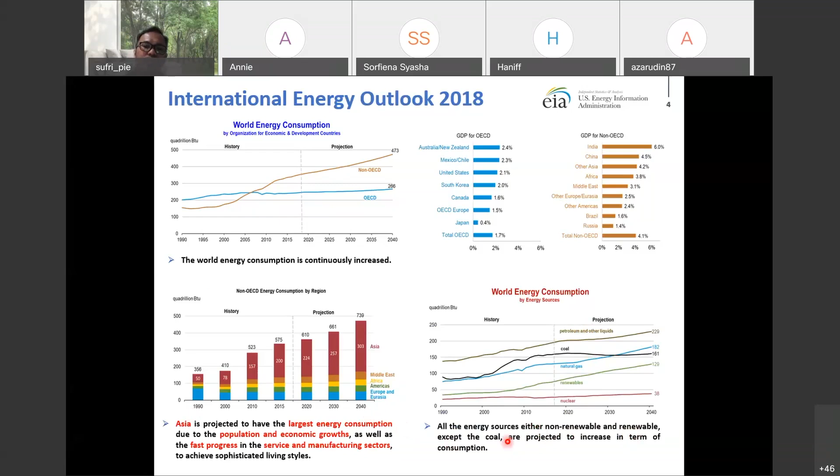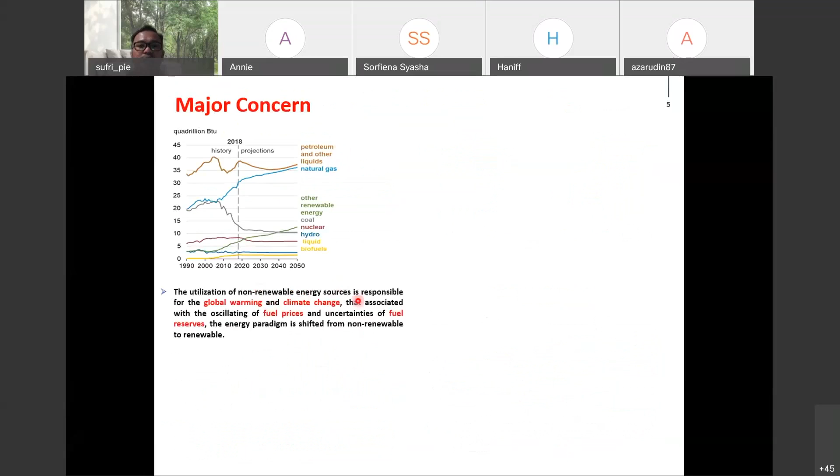So what is the problem with this increasing energy consumption? The major concern is the utilization of non-renewable energy. Non-renewable energy, for example petroleum and natural gas that we normally use in daily life, is responsible for global warming, and climate change is a problem we face every day. It is also associated with oscillating fuel prices and the uncertainty of fuel reserves.

So the energy paradigm has started to shift from non-renewable, petroleum-based energy into renewable sources of energy. We know transportation is the major contributor to carbon dioxide emissions, the main factor for global warming. Interestingly, from reports, mixing or combining the use of non-renewable and renewable energy could reduce CO2 emissions across all sectors.

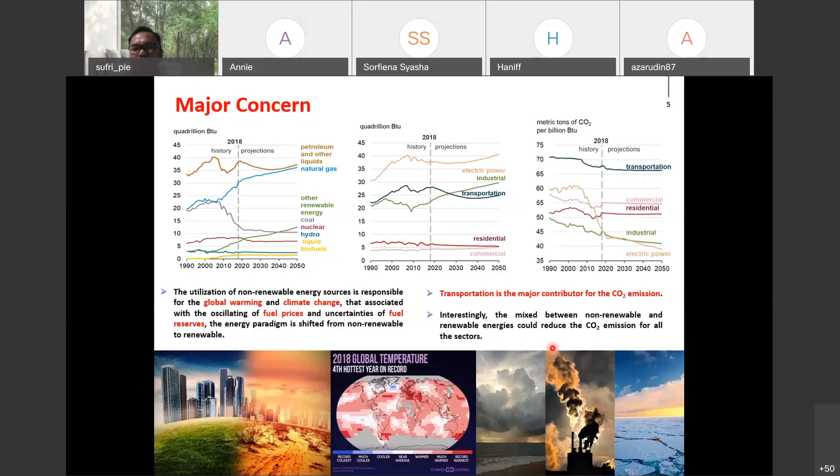The latest data regarding the world energy scenario is available in the Annual Energy Outlook 2020, published by the US Energy Information Administration. For those researchers and students involved in energy research, you can refer to this report to assist your research studies.

Since my research is more focused on hydrogen, let me explain a little about hydrogen as an energy carrier. It's quite famous - hydrogen can be used as an alternative energy carrier for the transportation sector due to the success of fuel cell technology. Hydrogen technology is very famous in Japan, and also in Malaysia. We have buses using hydrogen. I think in Sarawak they are starting to use hydrogen as fuel for their public transportation, mainly buses.

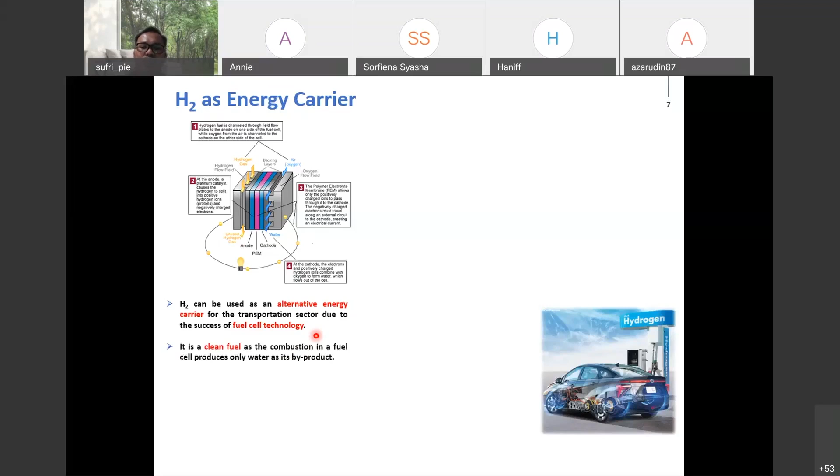So why are we interested in hydrogen? Because hydrogen is a clean fuel - its combustion in the fuel cell only produces water, meaning the product is water, so there's no CO2. This is the reason it has become famous nowadays. Another reason is in terms of energy density - hydrogen has the highest energy density compared to other types of fuel or energy.

Unfortunately, hydrogen itself is not readily available in nature. We have to extract hydrogen from somewhere - it cannot be captured from the air. So hydrogen can be produced from various resources, either non-renewable or renewable.

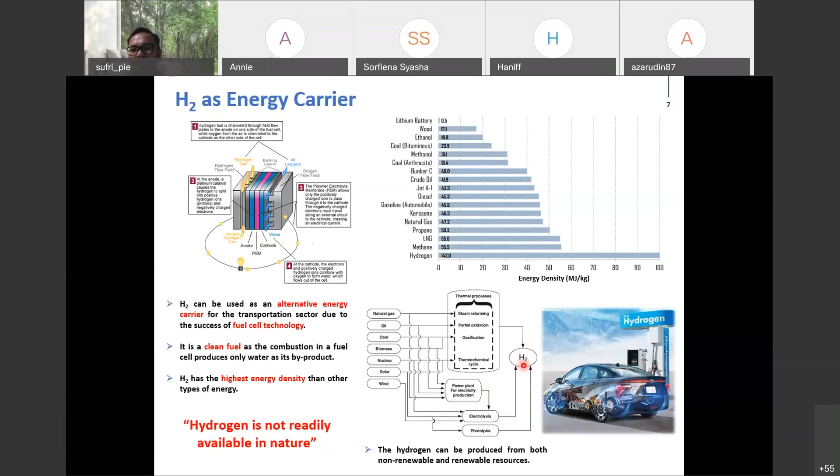As you can see in this diagram, conventionally we can obtain hydrogen from natural gas, oil, and coal - these are non-renewable resources. But researchers and industry have started to produce hydrogen from other sources like biomass, nuclear, solar, and wind. All these resources undergo different processes, either gasification, electrolysis, photolysis, and so on, in order to produce hydrogen.

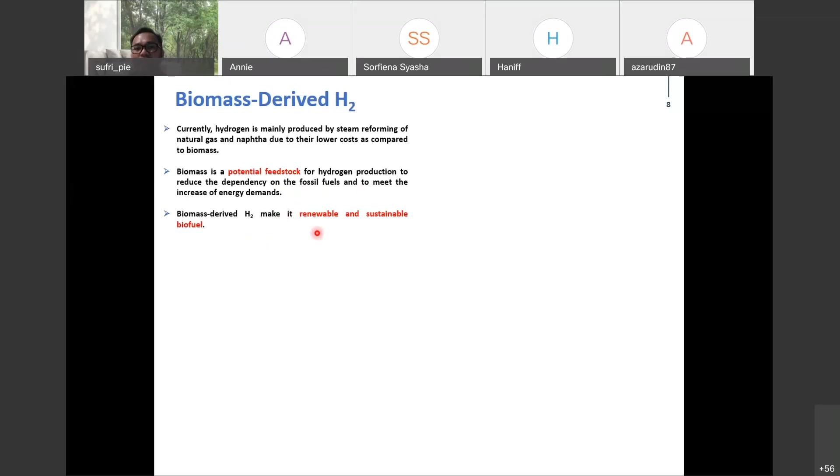I will be focusing on hydrogen produced from biomass. Currently, hydrogen is mainly produced by steam reforming of natural gas or naphtha - this is a non-renewable, petroleum-based resource, due to the lower cost of production. Biomass has great potential as a feedstock for hydrogen production. It can reduce dependency on fossil fuels and help meet the increasing energy demand. If we produce hydrogen from biomass, it can be renewable and sustainable as a biofuel.

So here are several examples of biomass that are widely available. We have corn, wood, and sugarcane - this is lignocellulosic biomass. But in Malaysia, or even in Southeast Asian countries, we are very famous for oil palm. So, oil palm biomass - for your information, each oil palm tree produces only 10% oil, while the remaining 90% is biomass.

So we have several types of biomass. We can have the frond, the pelepah. We can have the trunk, which is the batang pokok. We can have the bunches, EFB, after we pull out the palm fruit before extracting the oil. We can have the fiber, but for this research I will focus on investigating the potential of OPF, oil palm frond, as the feedstock for my hydrogen production. I chose OPF for two reasons.

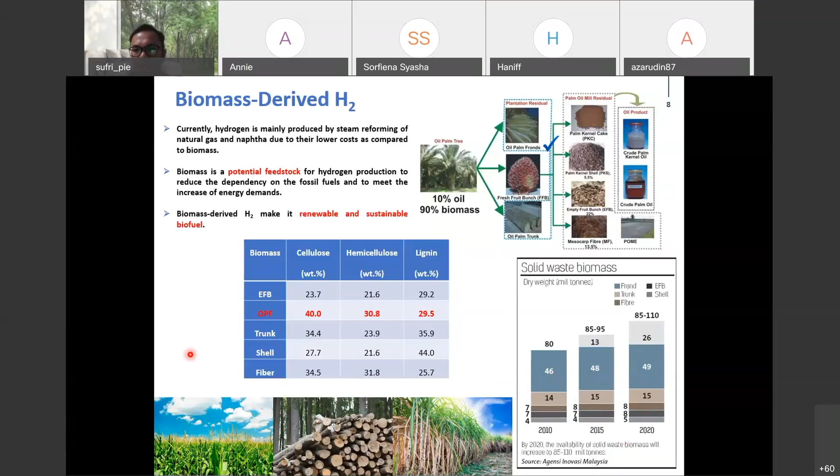So, conversion of the biomass is quite difficult. So I use this latest technology. It's not the latest; this is quite recent. We call it supercritical water gasification. From the name, it is the extension or modification of gasification. Gasification is the conventional way to produce gas from biomass. But in this technology, we employ supercritical water as the reaction medium.

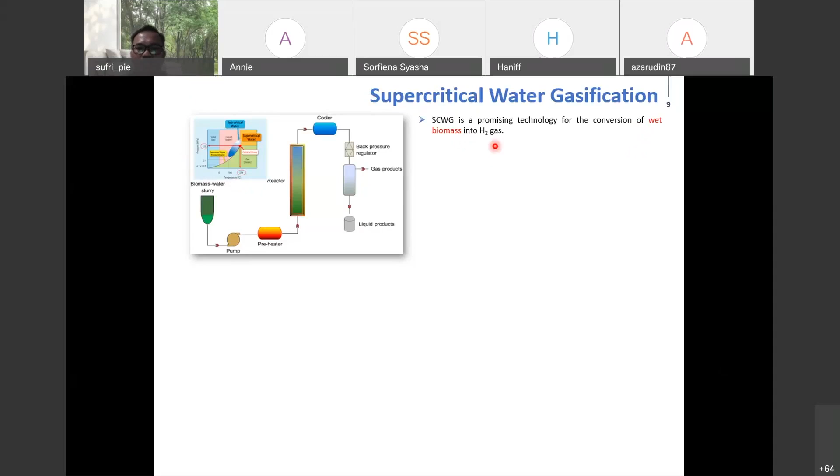Remember, biomass normally contains a huge amount of moisture. This is the main problem when we use biomass as the feedstock. In this technology, we use supercritical water as the reaction medium, so we don't need pre-drying treatment for the biomass because we mix the biomass with the supercritical water. However, in conventional gasification, before we start the gasification reaction, the biomass has to be dried.

So, supercritical water gasification of real biomass. Real biomass means real feedstock, like the ones explained just now, the bagasse, the corn. It's more challenging compared to gasification of a model compound. A model compound is when we focus on one type of chemical like cellulose, hemicellulose or lignin. Gasification of biomass is quite challenging because it's a mixture of cellulose, hemicellulose and also lignin. So converting this biomass into the simplest molecule, which is hydrogen, is very tough.

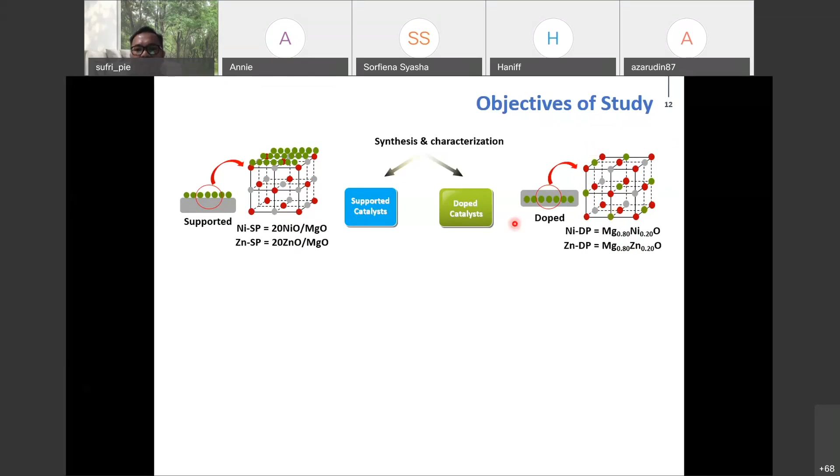For the objective of the study, I synthesized and characterized two classes of catalysts: supported catalysts and doped catalysts. For the supported catalyst, the active metals, nickel oxide and zinc oxide, are supported onto magnesium oxide, the catalyst support. For the doped catalyst, the active metals nickel and zinc are doped substitutionally, or inserted, into the cubic structure of the magnesium oxide. From this diagram, you can differentiate the supported catalyst and the doped catalyst.

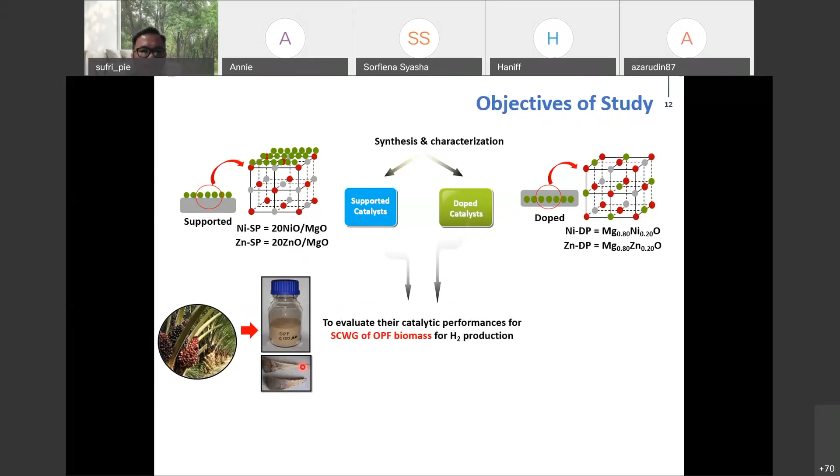Next, the catalytic performance of the synthesized doped and supported catalysts was evaluated for the gasification of OPF, the oil palm frond, in order to produce hydrogen. Hopefully, it can be used in a car. Last but not least, the relationship between the catalyst properties that we design and the catalytic performance will be discussed in detail.

For the methodology, the supported catalysts were synthesized using a conventional technique, the impregnation method. The doped catalysts were obtained using the combustion method. For details of the methodology, you can refer to my published paper; I won't explain it in detail. The precursors obtained from these two synthesis methods were calcined at 600 degrees C for 6 hours to give the expected catalysts. The catalysts then underwent a series of characterization techniques: XRD, BET, FESEM, HRTEM, and XPS analysis.

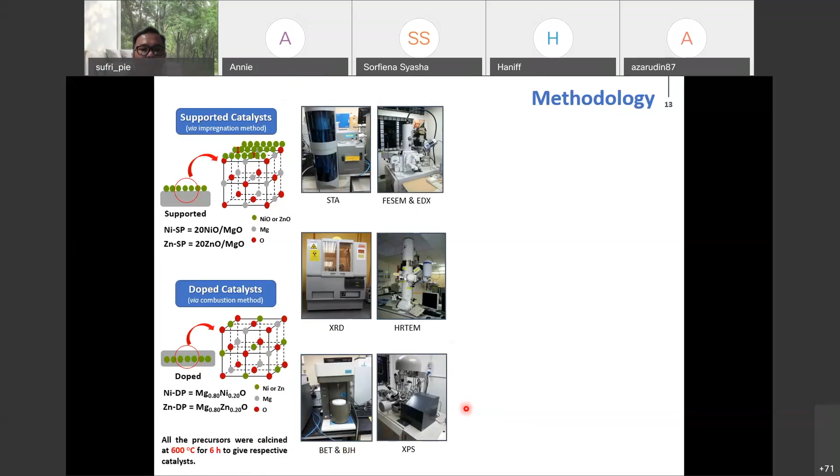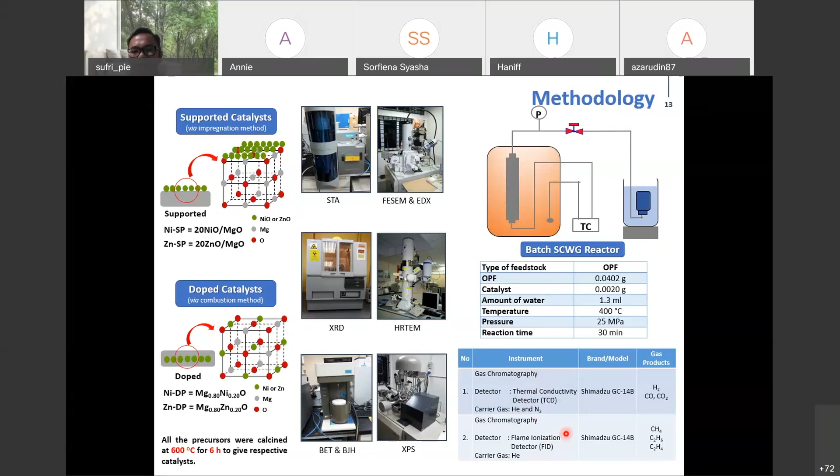For the catalytic performance, we use a batch supercritical water gasification reactor. This is the schematic diagram of the reactor. The biomass, the OPF, is loaded together with the catalyst in this reactor. We top up with water, then heat the reactor up to 400 degrees Celsius and 25 megapascals for 30 minutes. After the 30-minute reaction, we stop the reaction and this valve is opened. The gas produced flows out and is collected using a sampling bottle. The gas product is analyzed by gas chromatography, using GC-TCD and GC-FID.

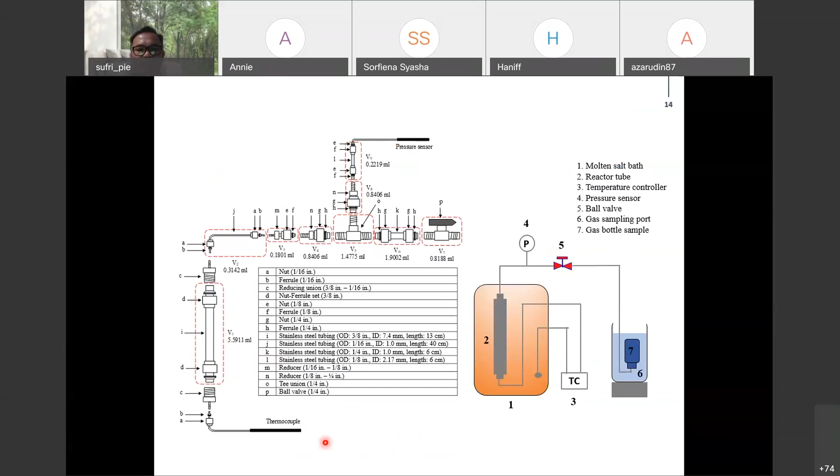So this batch reactor is fabricated by myself. I made it on my own during my research attachment at Hiroshima University in Japan. Since my background is not engineering, fabricating the reactor was tough, but I pushed through to make it complete. Alhamdulillah, with the help of all the engineers and researchers, I managed to fabricate the reactor on my own.

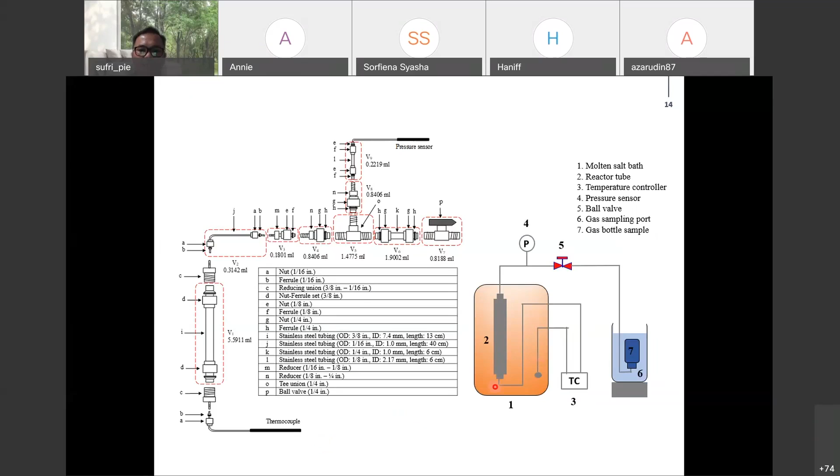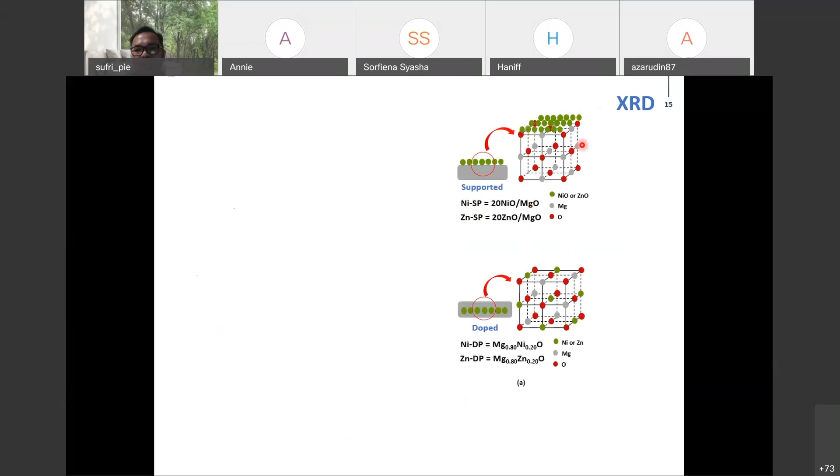So now we're moving forward to the results and discussion. First is the XRD. The supported and doped catalysts synthesized in this study can be illustrated using this diagram. I think most of you already understand the difference between supported and doped. Supported means the active metal is on top of, or outside, the cubic magnesium oxide. For doped, the active metals, nickel and zinc, we try to insert into the cubic structure of the magnesium oxide.

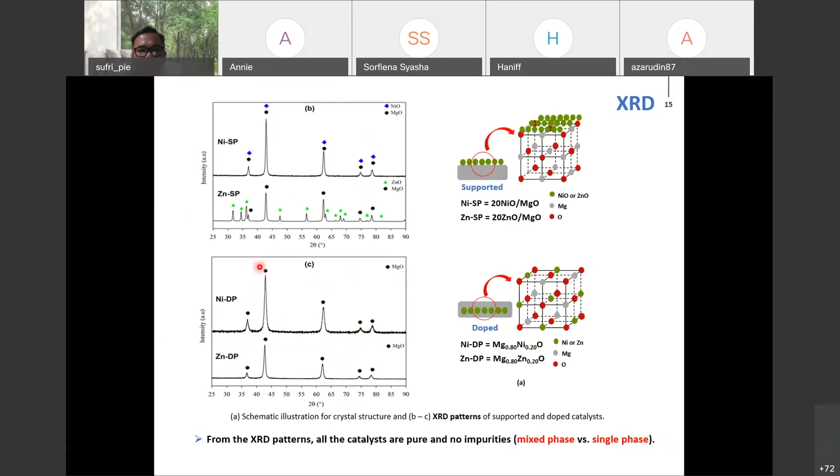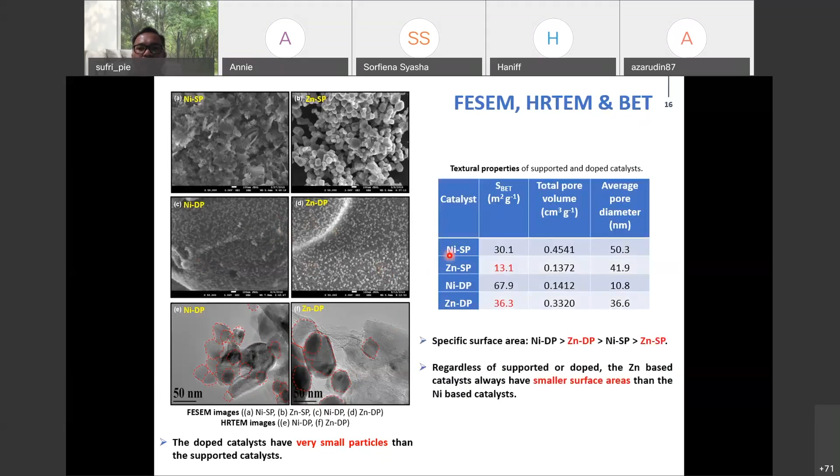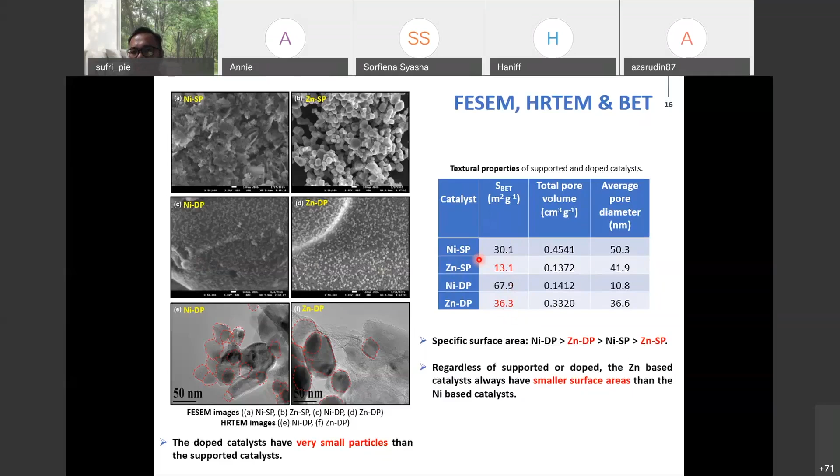This finding is in agreement with the surface area from the BET analysis. The doped catalysts, nickel DP and zinc DP, have a larger specific surface area than the supported catalysts. The smaller the particle, the larger the surface area. Regardless of supported or doped, zinc is always lower in surface area. But later, in the catalytic reaction, surprisingly, the zinc-based catalyst performs better compared to the nickel-based catalyst.

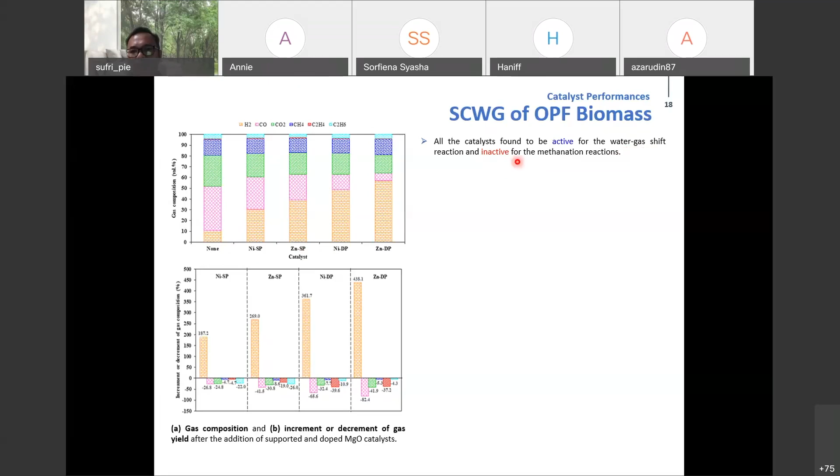All the catalysts that we studied are active for the water-gas shift reaction. If you still remember, the water-gas shift reaction is important, and they are inactive for the methanation reaction. Why do we say so? If you observe closely, the yield of hydrogen keeps increasing, and the yield of carbon monoxide, the pink color, keeps reducing. This agrees with the water-gas shift reaction.

However, the methanation reaction is not activated. This is why you observe the blue color: the methane yield remains unchanged across the different types of catalyst. So the catalysts that we reported are active for the water-gas shift reaction, but not active for the methanation reaction.

Okay, another finding concerns the doped catalysts. I changed this diagram into another presentation so we can see it clearly. The yield of hydrogen keeps increasing, and the yield of other gases is reduced. So we can also see the doped catalysts, nickel DP and zinc DP, perform better compared to nickel SP and zinc SP.

For the zinc-based catalysts, regardless of the structure, supported or doped, we find zinc is always better than nickel. This means zinc is the active component to gasify the biomass to produce a high hydrogen yield.

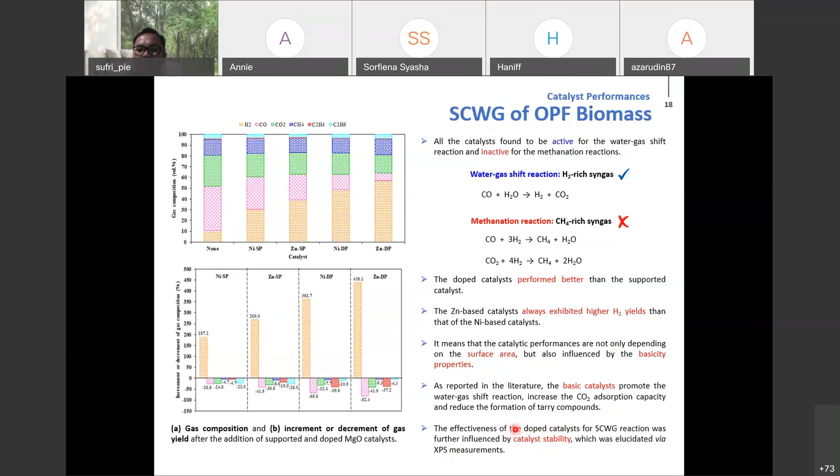When we analyze the result carefully, we find the catalyst stability can be arranged in this order, depending on the BE value. So zinc DP is the most stable compared to zinc SP, and the nickel catalyst has less structural stability. All right. The details of the binding energy values are given on the next slide. All right, I think it's quite a lot already.

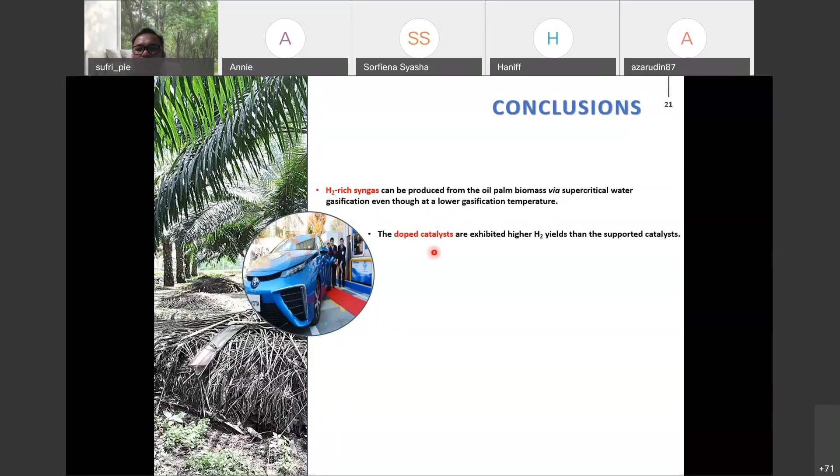I come to the conclusion. We can conclude that hydrogen-rich syngas can be produced from our local oil palm biomass by supercritical water gasification, even at a lower gasification temperature of 400 degrees C. The doped catalyst structure exhibited a higher hydrogen yield compared to the supported catalyst. Also, we find the zinc-based catalyst more active for hydrogen production compared to the nickel-based catalyst.

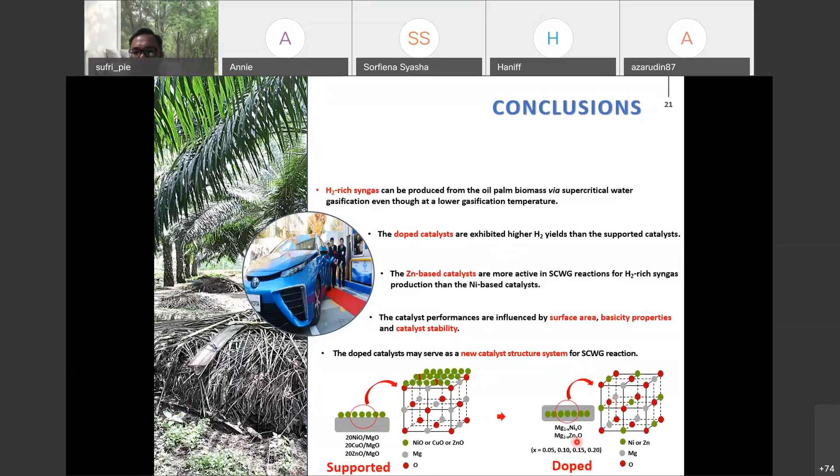We say the catalytic performance is not only depending on the surface area; it can be influenced by the basicity, the amount, and also the strength, and also it can be influenced by the stability. The doped catalyst, the doped structure, may serve as the new catalyst structure system for the supercritical water gasification reaction. So our novelty in this study: we try to shift the thinking from the supported type of catalyst into the doped catalyst. All right. Okay.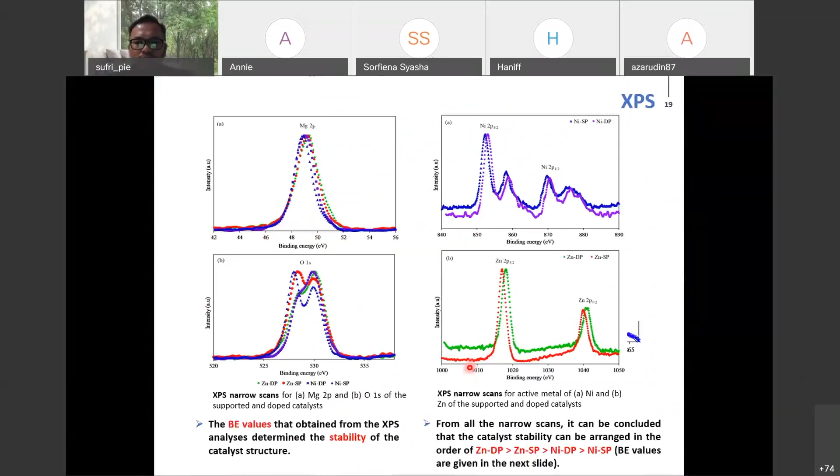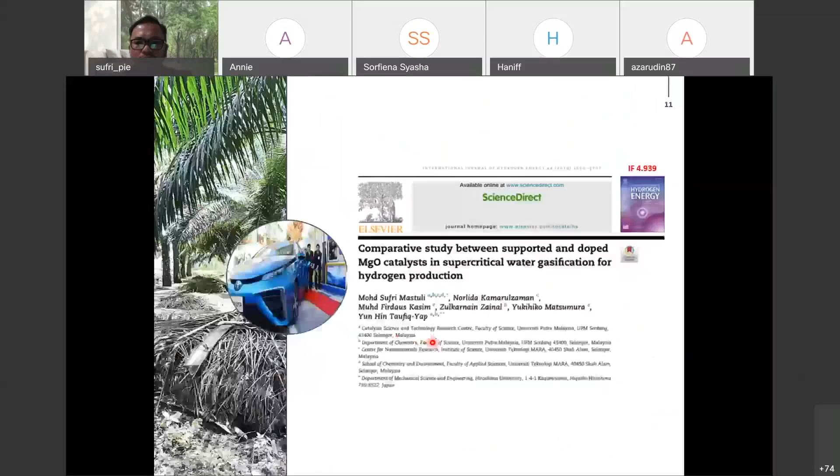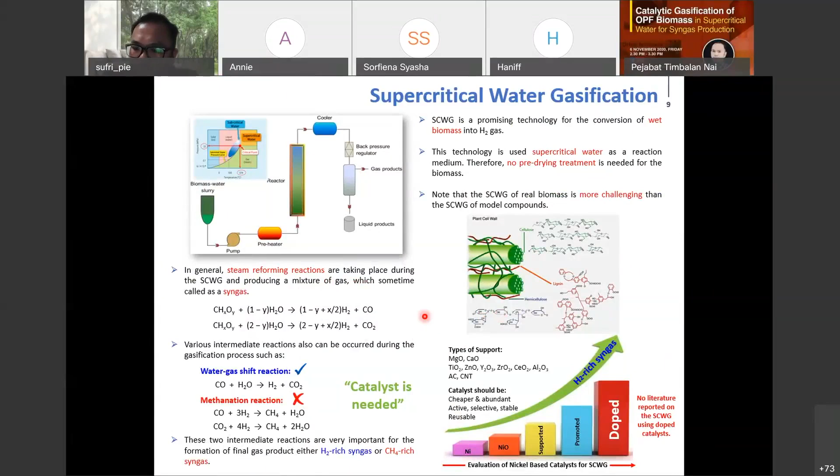Okay. Thank you, Dr. Sufri. It's a very informative sharing session with you. So I would like to ask for your permission, so we go for the Q&A session, Doctor? Yeah, sure can. Okay, so actually there is a question online. Wait, I check for you first. Okay, so there are views from our reviewer: your research is a very good commercialization potential finding, especially from oil palm waste. I believe this is from Zaliha. And there is a question for you, Doctor. Yes, this is from Professor Rusop. Oh, okay, the head of center.

Yes, he's asking you. The first question is why the relationship between the surface area and pore size of the doped sample is not linearly correlated. And he asks you to please explain a bit more related to how the basicity properties support the surface area and how to determine the basicity properties. So maybe you can go for the first question first, Doctor.

Yeah, hopefully I don't forget. See the question, surface area and pore size. The first question is regarding, what is it? Why the surface area? Because I cannot see the question. Yes, the relationship between the surface area and pore size, it is seen that it is not linearly correlated. Why is that? Oh, okay. All right. I got the point. Rusop is asking me why the surface area is not correlated with the porosity. Yes.

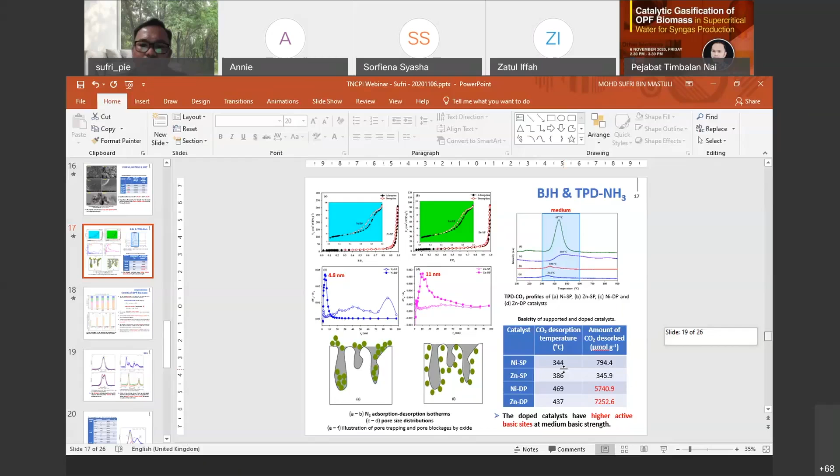The basicity contributed in this study comes from the active metal - not only the active metal like nickel and zinc, but the magnesium oxide is basic enough. We know alkaline metal oxides, like calcium oxide and magnesium oxide, are also basic metal oxides. So how do I relate the basicity to the catalytic performance?

According to the literature, as I mentioned, promoting the water gas shift reaction requires a basic catalyst, not an acidic one. If it's an acidic catalyst, the water gas shift is not activated. So the basic catalyst promotes the water gas shift reaction - it provides the reaction medium for the carbon monoxide to react with water, boosting and elevating the yield of hydrogen.

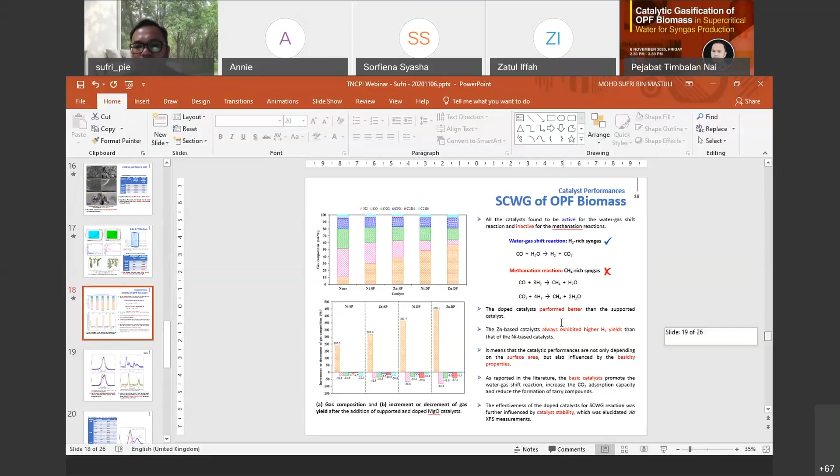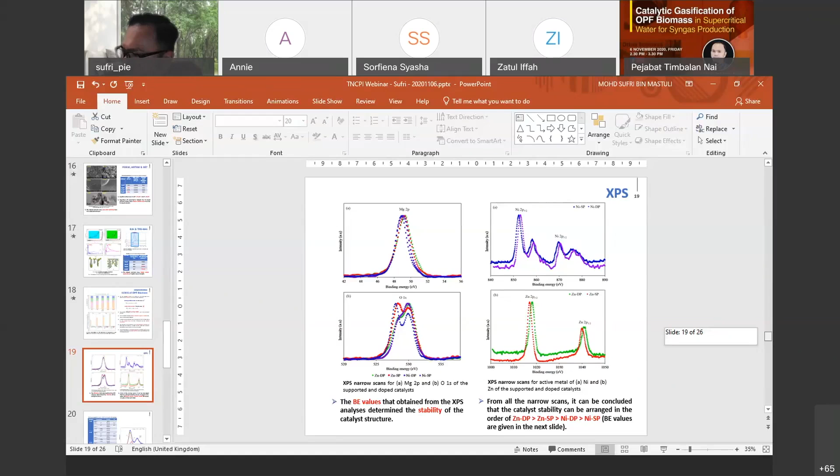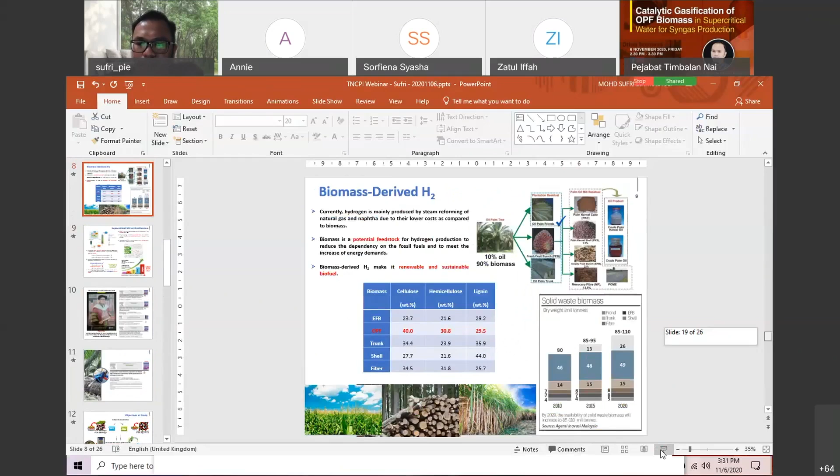Okay, another question, Dr. Ini? Dr. Sufri, time is running out, so there's no other question, but I have a question for you because I'm very interested in the biomass front. Where did you get all those fronds, Dr. Sufri? Did you make a collaboration with, maybe, a palm oil company or whatsoever?

The biomass that I use in this study, the OPF biomass - where did I find it? During my PhD study duration, I just went to any kebun, the plantation. At that time I went to Putrajaya, nearby a plantation. I just went and collected the dry OPF that had fallen from the trees, then did the processing - cut it, sieved it, chopped it. I did it by myself, not obtained from any supplier. I just went to the kebun, the plantation, and collected it myself.

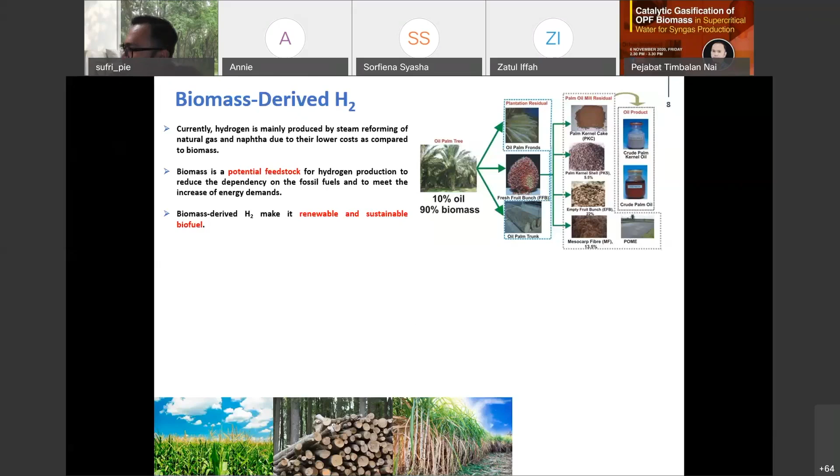So maybe for your future collaboration, you could approach a palm oil company. Unfortunately, I'm really looking forward to collaboration on these things. Of course, I think the potential of hydrogen as a fuel is good, but unfortunately I couldn't carry out the gasification reaction in my lab at the Institute of Science. So it's sad to say.

I stopped the gasification reaction because I don't have the reactor to convert the product into hydrogen. But I believe some researchers from chemical engineering are actively working in gasification. Maybe I can join them or they can join me, because my specialty is in the catalysis area instead of biofuel - biofuel is the application of it. So I'm looking forward to future collaboration, perhaps from industry, with one collaborator from SIRIM in section 2. Inshallah, they are focusing on Syngas, the biofuel. I can visit the lab and see how to match the research interests between me and their researchers.